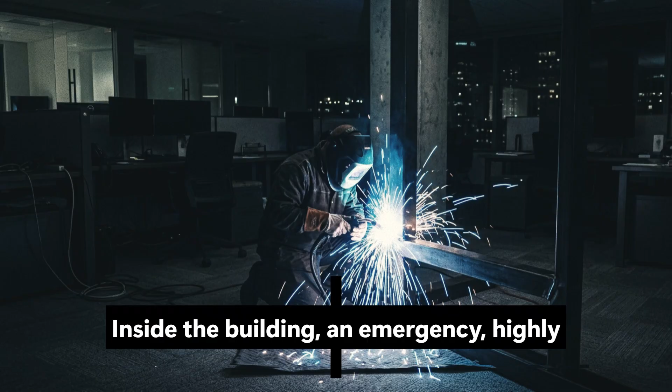And the terrifying truth? The engineers already know. Inside the building, an emergency, highly classified operation is underway. While executives work in their offices by day, a secret crew of welders takes over at night. They are frantically trying to fix the building before a massive storm, Hurricane Ella, slams into the eastern seaboard.

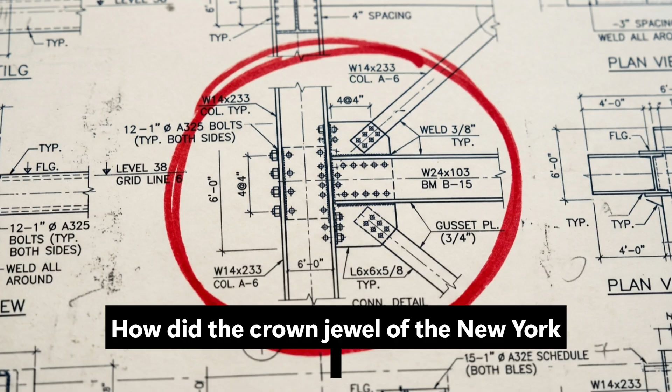The NYPD has secretly drawn up mass evacuation plans. The Red Cross is quietly put on standby for a mass casualty event. But not a single word of this is leaked to the public. Not to the press. Not to the people walking on the streets below. How did the crown jewel of the New York skyline become a ticking time bomb?

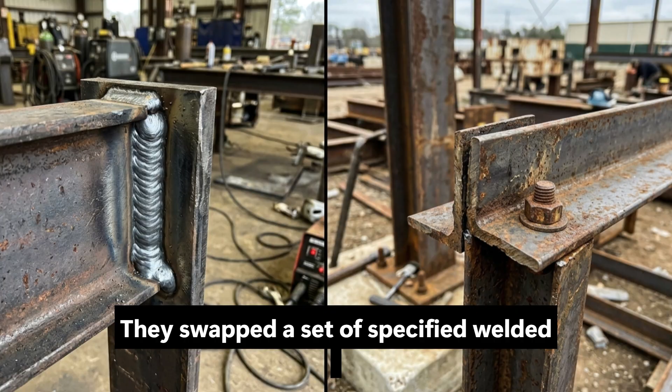It wasn't due to radical architectural risks or a lack of advanced engineering. The entire crisis, and the terrifying cover-up that followed, was caused by a single, seemingly harmless decision made by a contractor to save a fraction of a percent on construction costs. They swapped a set of specified welded joints for cheaper, standard steel bolts.

This is the story of how a tiny attempt to save time and money almost destroyed Manhattan, and the college student who accidentally uncovered the secret.

To understand the flaw, we have to go back to 1970. Citibank wanted a new global headquarters in Manhattan, and they found the perfect location at the corner of 53rd Street and Lexington Avenue. There was just one massive problem. The northwest corner of that block was already occupied by St. Peter's Lutheran Church. The church had been there since 1862, and they absolutely refused to sell their land and be displaced. Citibank's grand architectural vision was completely blocked.

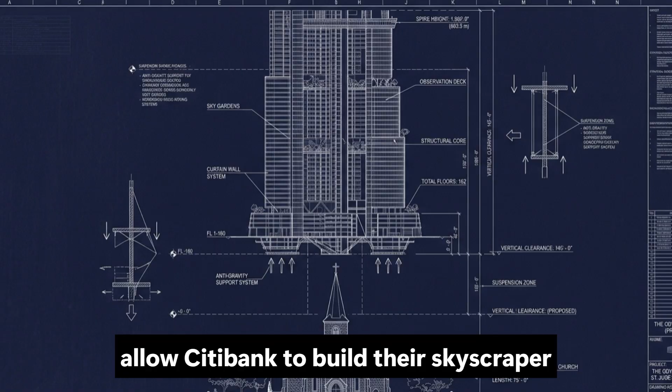So, a deal was struck. The church would allow Citibank to build their skyscraper over them, but under one strict condition: the new building could not touch the church. Enter William LeMessurier, one of the most brilliant structural engineers of the 20th century. He was handed an impossible task: build a 915-foot skyscraper that essentially hovered over an existing building.

LeMessurier's solution was nothing short of genius. Instead of putting the building's support columns in the four corners, like every other skyscraper in the world, he moved them to the center of each side. He placed the entire 59-story tower on four massive, 114-foot-tall stilts. This allowed the building to straddle the church entirely, leaving it untouched below.

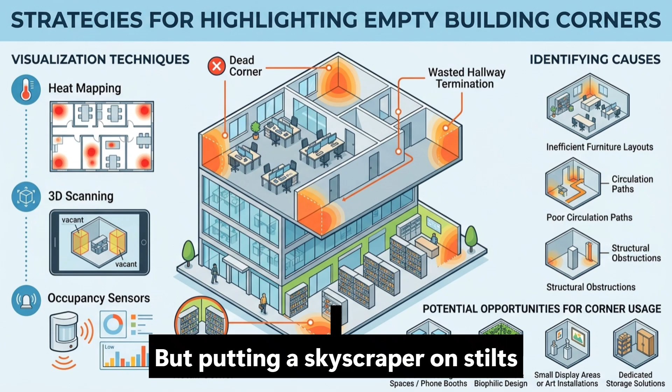But putting a skyscraper on stilts creates a massive structural challenge. The corners of the building were completely unsupported. They were literally hanging in midair. To keep the tower from ripping itself apart under its own weight, LeMessurier designed a unique, external skeletal structure.

He used massive steel V-shaped braces, called chevron bracing, that stacked up the sides of the building. These braces acted like giant funnels, channeling the weight of the structure away from the empty corners and down into the center stilts. And to counter the swaying caused by high-altitude winds, LeMessurier installed a cutting-edge piece of technology at the very top of the building: a tuned mass damper.

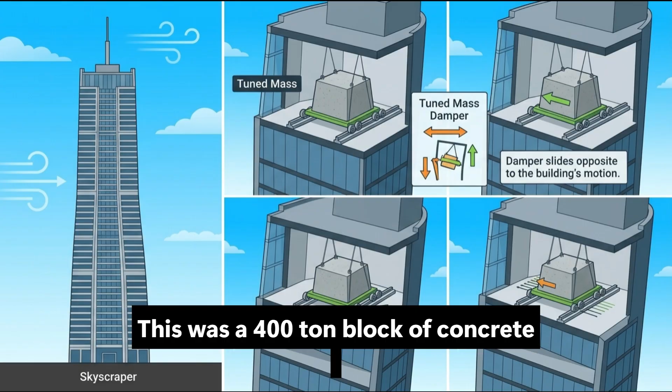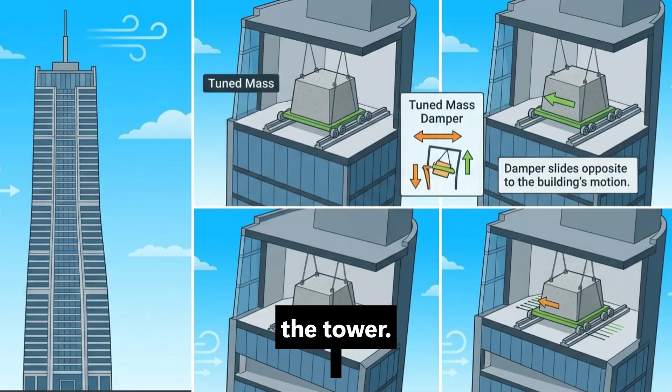This was a 400-ton block of concrete resting on a thin film of oil. When the wind pushed the building one way, the computer-controlled damper would shift its weight the opposite way, stabilizing the tower. On paper, it was an engineering masterpiece. It was elegant, innovative, and perfectly calculated. In 1977, the Citicorp Center opened to massive public acclaim. But what LeMessurier didn't know was that his masterpiece had already been quietly compromised during construction.

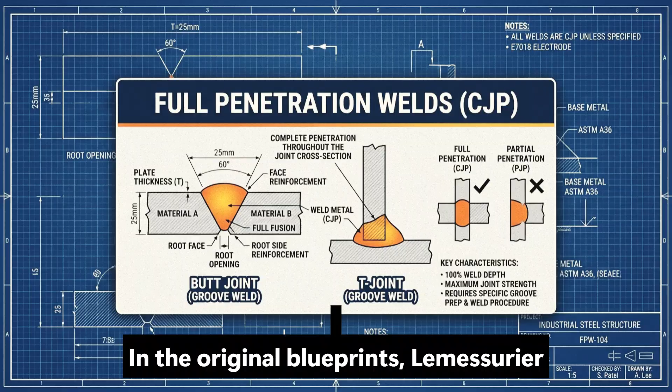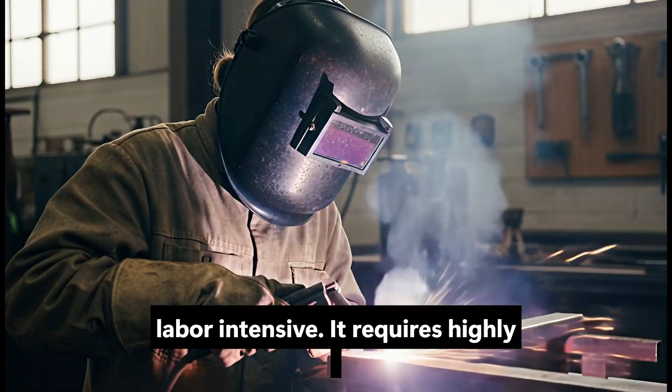In the original blueprints, LeMessurier mandated that the massive steel chevron braces had to be connected using full penetration welds. Welding steel at that scale is incredibly labor-intensive. It requires highly skilled workers, massive amounts of heat, and weeks of careful execution. But it creates a joint that is as strong as a continuous piece of solid steel.

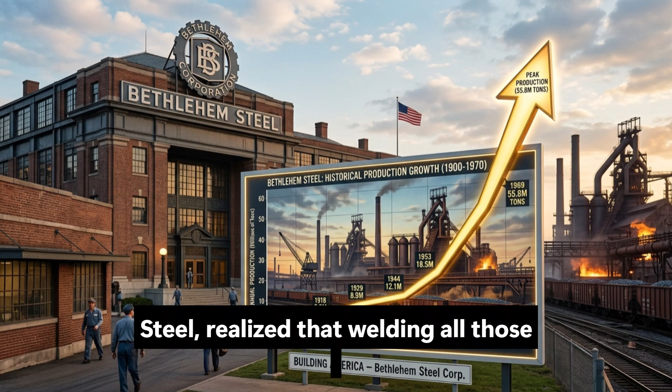During the construction phase, the company hired to build the steel frame, Bethlehem Steel, realized that welding all those massive joints was going to be expensive and slow. They saw an opportunity to cut costs and speed up the timeline. They proposed changing the connections. Instead of welding the joints, they wanted to bolt them together using heavy-duty steel bolts.

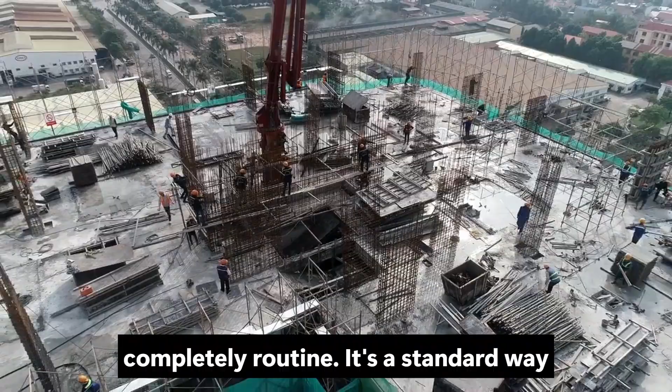In standard skyscraper construction, switching from welds to bolts is completely routine. It's a standard way to save on specialized labor. The proposal was sent to LeMessurier's New York office, where it was reviewed by a subordinate. Looking at the standard building codes for wind resistance, the subordinate saw no issue and approved the change. William LeMessurier, the master architect of the building, was never directly informed. He assumed his tower was built exactly as he designed it, solid, welded, and invincible.

The building was finished. The massive steel joints were bolted, not welded. And for a year, the building stood tall and proud in the Manhattan skyline, housing thousands of office workers. The tiny shortcut saved Bethlehem Steel a modest sum of money, but it introduced a catastrophic vulnerability that no one in the world knew existed.

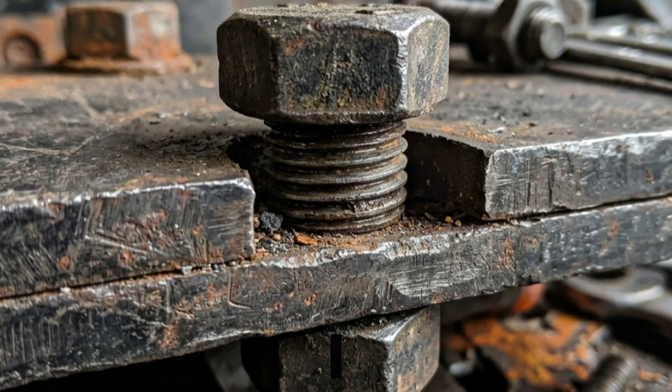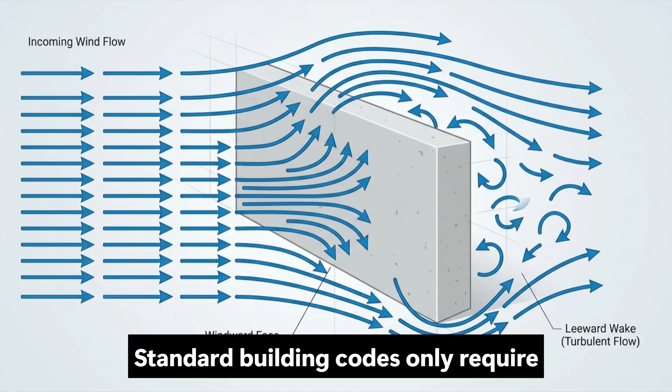In June 1978, Diane Hartley, an undergraduate architecture student at Princeton University, was working on her senior thesis. She had chosen the newly built Citicorp Center as her subject. As she analyzed the unique design of the 4 stilts, she noticed something peculiar about the wind load calculations. Standard building codes only require engineers to calculate for winds hitting the building straight on, directly against the flat faces.

But Hartley wondered about quartering winds. What happens when the wind hits the building diagonally, striking the corners instead of the flat sides? In a normal building with columns on the 4 corners, quartering winds aren't a massive issue. But the Citicorp Center was different. Its corners were hanging in midair.

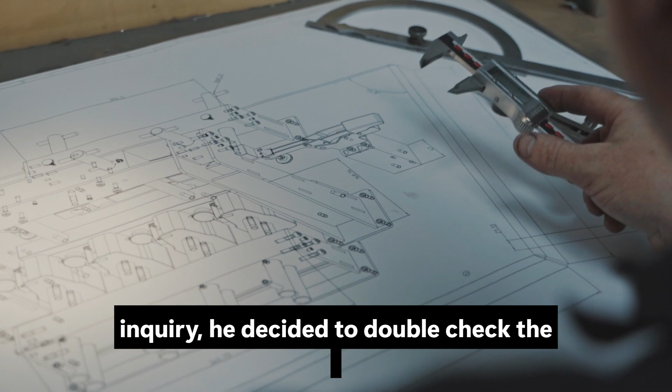Hartley called William LeMessurier's firm to ask for the data on quartering winds. She spoke to a junior engineer, who confidently told her the building was perfectly safe. When LeMessurier heard about the student's inquiry, he decided to double-check the math himself. He wanted to prove that his innovative design could withstand any angle of attack. He ran the numbers for quartering winds. The results made his blood run cold.

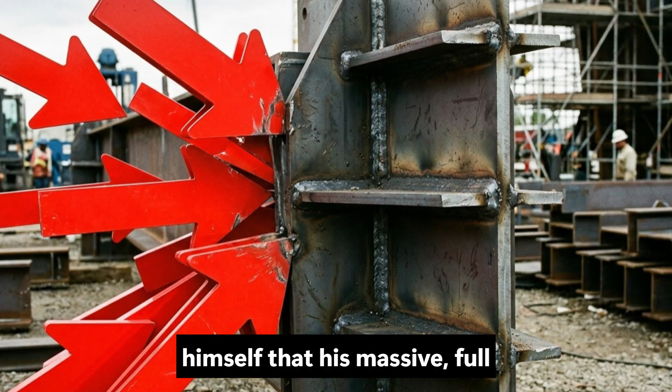When a strong wind hit the Citicorp Center diagonally, the aerodynamic pressure actually increased the stress on the building's steel chevron braces by 40%. A 40% increase in stress. LeMessurier was initially worried, but he reminded himself that his massive, full-penetration welded joints could easily handle that extra load. Then, the hammer dropped. While reviewing the final construction documents to confirm the welds, he discovered the change order. The joints weren't welded. They were bolted.

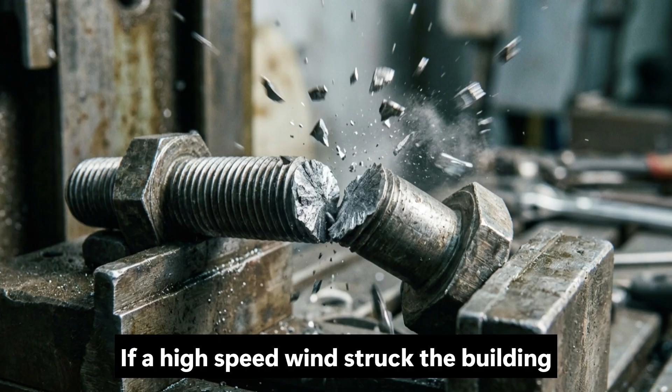LeMessurier scrambled to calculate the maximum strength of the bolted joints against a quartering wind. The math was undeniable, and it was absolutely terrifying. If a high-speed wind struck the building at a 45-degree angle, the bolts would shear completely off. The chevron braces would fail, and the 59-story skyscraper would collapse.

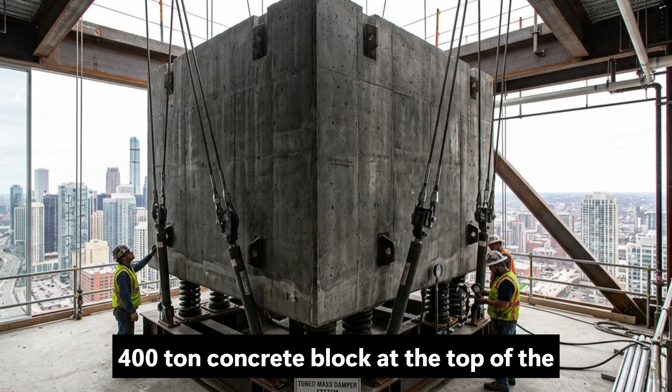But what about the tuned mass damper? The 400-ton concrete block at the top of the building would surely counteract the swaying, right? LeMessurier checked the weather data. The damper required electricity to run. In a massive storm, the power in New York City often goes out. If the power failed, the damper would shut down.

Without the damper, and with the weakened bolted joints, LeMessurier calculated that a windstorm strong enough to topple the Citicorp Center would occur, statistically, once every 16 years. He hadn't built an indestructible monument. He had built a guillotine hanging over the city of New York.

LeMessurier faced an agonizing choice. If he stayed silent, he might get away with it. But if the building fell, he would be responsible for the deaths of tens of thousands of people. If he confessed, his career would be destroyed. His reputation would be ruined, and his firm would be bankrupted by lawsuits.

He chose to speak. He immediately flew to New York and met with the executives at Citibank. He laid out the math. The building was critically unsafe, and they had to fix it immediately.

The executives were horrified, but they agreed to fund the emergency repairs. However, they made a critical decision: the public could not know. If the truth leaked, it would cause mass panic. And so began one of the most intense, secretive engineering operations in history.

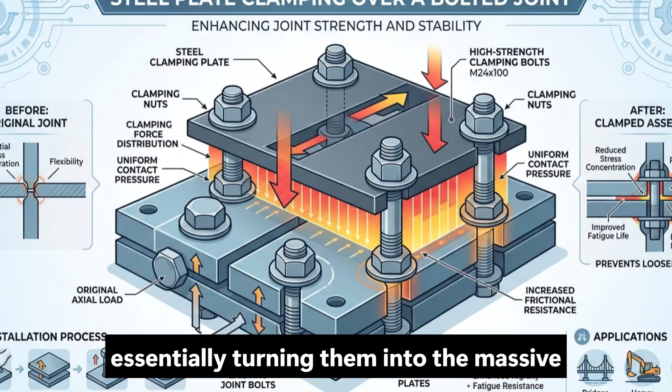The plan was to weld 2-inch thick steel plates over all 200 of the bolted joints, essentially turning them into the massive welded joints they were originally supposed to be. To keep it a secret, the welders could only work at night.

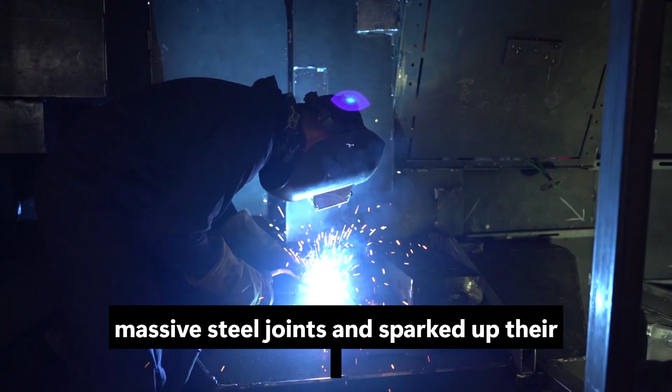Every evening at 8 p.m., after the office workers went home, teams of welders flooded into the building. They tore open the drywall, exposed the massive steel joints, and sparked up their torches. They welded continuously until 4 a.m. Before the sun came up, they frantically cleaned the workspace, vacuumed the debris, and threw up temporary drywall.

When the office workers arrived at 9 a.m., the building looked perfectly normal. No one had a clue that the skeleton of the building was being desperately reinforced while they typed at their desks. But the clock was ticking.

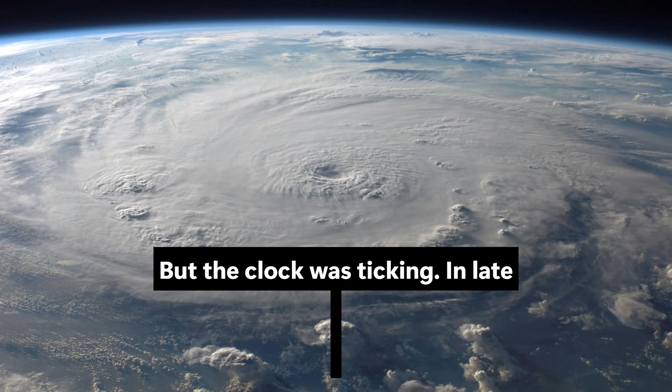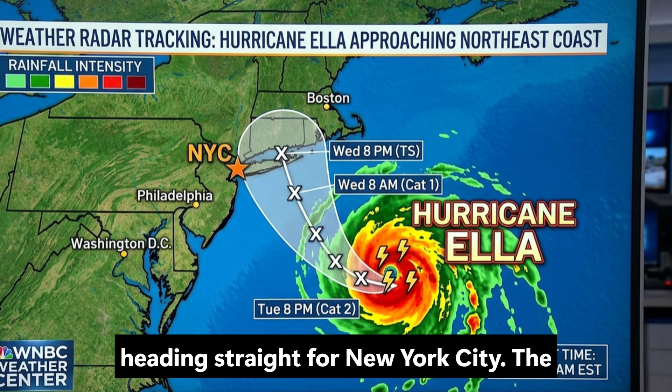In late August, halfway through the repairs, a massive weather system formed in the Atlantic Ocean. It was Hurricane Ella. The storm was a Category 4, and it was heading straight for New York City. The building's joints were only half welded. It was not ready. The city secretly mobilized.

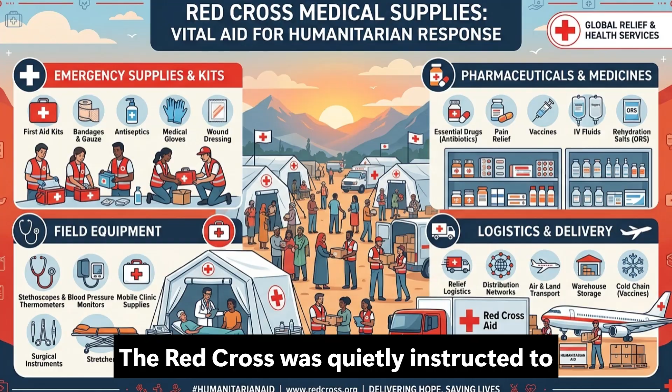The NYPD cordoned off a 10-block radius around the tower under the guise of an emergency drill. The mayor's office prepared a mass evacuation order for Midtown Manhattan. The Red Cross was quietly instructed to prepare thousands of blood bags and body bags.

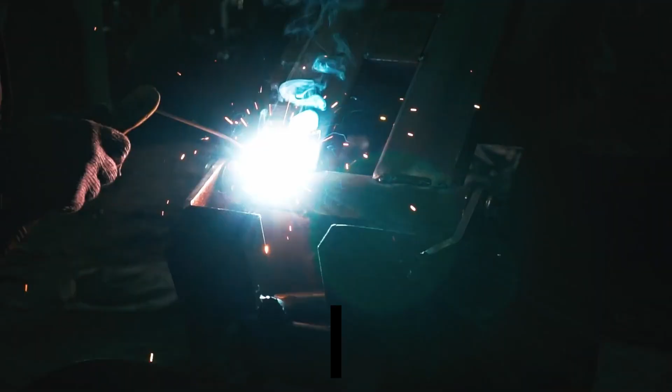Inside the tower, the welders worked furiously, racing against the approaching hurricane. The tension was suffocating. The fate of the city rested on the speed of their welding torches.

Then, a miracle happened. Just hours before landfall, Hurricane Ella stalled. It hit a cold front, turned abruptly east, and swept harmlessly out to sea. New York City was spared.

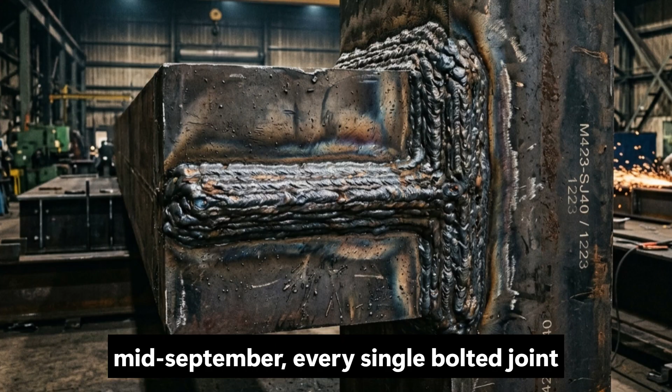The secret night crew spent several more weeks finishing the welds. By mid-September, every single bolted joint had been reinforced with solid steel plates. The building was finally secure. It could now withstand a 700-year storm.

The crisis was averted. The total cost of the secret emergency repairs was $8 million, more than $38 million in today's money. And the most incredible part of the story? The cover-up worked perfectly. The public remained entirely ignorant. The press never caught on.

For nearly 20 years, the true story of the Citicorp Center was an industry secret, discussed only in hushed tones among elite engineers. It wasn't until 1995, when a writer for The New Yorker published an exposé, that the world finally learned how close Manhattan came to a catastrophic disaster.

And what about Diane Hartley, the Princeton student whose simple question triggered the entire revelation? She never knew. She submitted her thesis, graduated, and moved on with her life. It took almost 3 decades for her to find out that her phone call had literally saved tens of thousands of lives. The Citicorp crisis remains a chilling reminder of the fragility of the systems around us.

Bethlehem Steel didn't set out to build a deadly trap. They just wanted to save a little bit of time and a little bit of money on labor. But in the world of high-stakes engineering, there is no such thing as a harmless shortcut. When you compromise the foundational integrity to protect the bottom line, it's never a question of if disaster will strike. It is only ever a question of when.